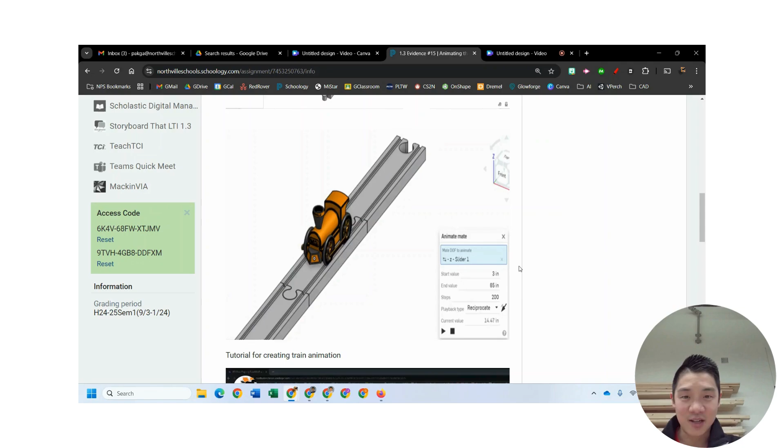So back at it, we're finishing up this animation. This is an updated video since the last one I had was a little blurry and not super clear, so we'll try it one more time. Let's give it a shot.

All right, so here's the approach. First off, here's the original one, so I'll show you where we're going with this. The goal is we're going to put together a few chunks of track, using a few mates for that. Then we're going to create a slider mate between the train and the tracks, and a rack and pinion to create the wheel motion on top of the tracks.

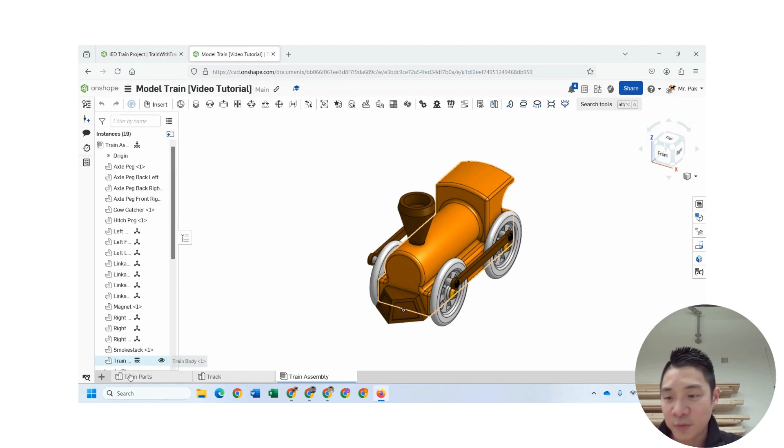All right, let's get started. First off, I'm going to create a new assembly so that we have a separated portion of this and potentially less confusing. I'm going to call it train with tracks, rename that, and let's start bringing in some parts.

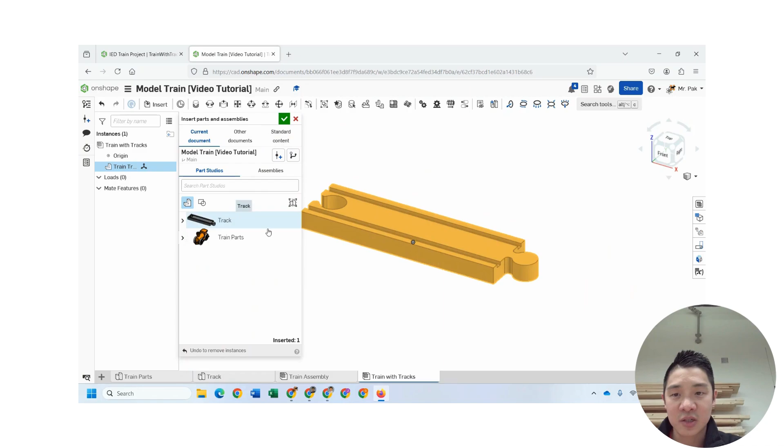So, insert. First off, I'll go and do the tracks, and as I bring these in, I'm going to click on this a few times. I don't remember how many there are on there, maybe 5 - we'll do 5, sure. All right, so there's 5. And then I'll go ahead and bring in the entire train as well, leave that on the side there.

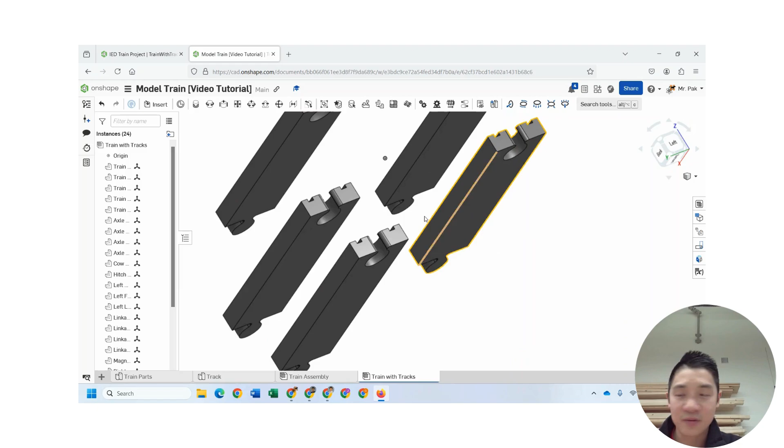Check mark. Okay, so for this first one, for the sake of organization, I'm going to move this to the middle. I'll right click on the center and say move to origin so that it's centered like that. For this very first part I brought in, right click on it, I'm going to hit fix. That way it's locked in place and everything's going to move around that particular train track.

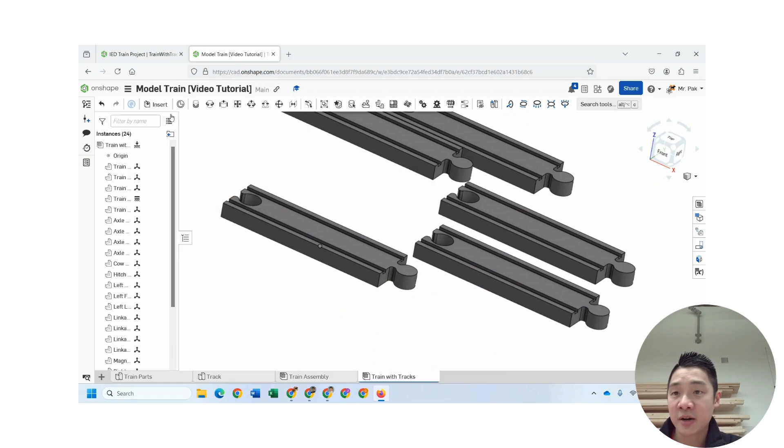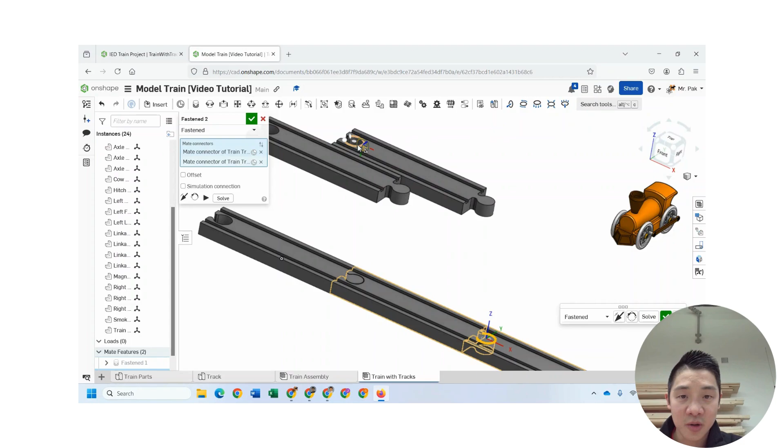Okay, so a couple ways you can do the mates here. I'm going to do fasten mates between them, and I think the easiest is probably the circle. So that circle, line up with that circle, hit the check, do the next one. This way - this circle, this one. Let's do 2 more. Here to here - oops, got rotated for some reason.

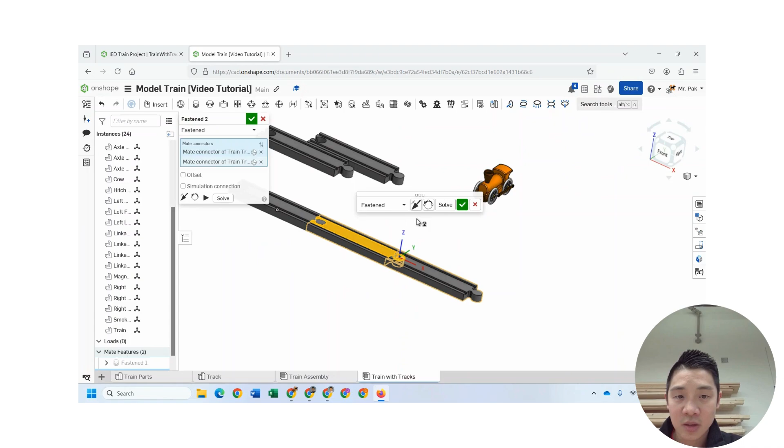You know what, let me try that one again. One more time, fasten - I'm going to do this edge to that face. Oh, there it is, okay, hit the check. Let's try another one - this face to that one. And then last one is, again, I'm going to zoom in and make sure I get that center of the circle to the center of that circle.

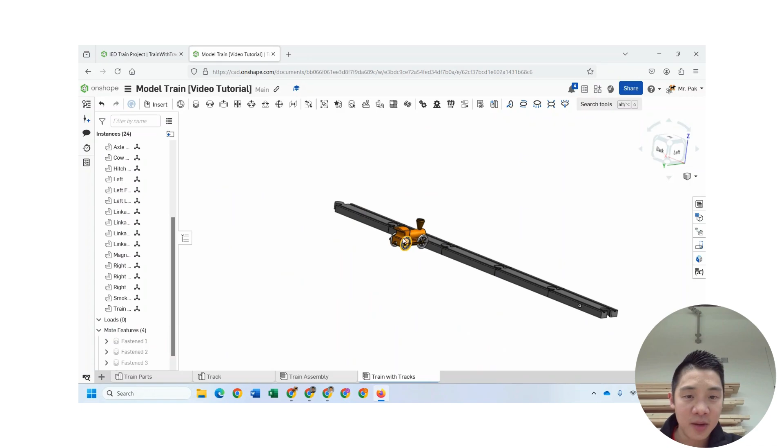All right, so we got the tracks all set up, and again I'm thinking about this as the train. Oops, let me make sure - for some reason this didn't come in as... sorry, my fault, I take that back. We want to not bring this in as individual parts. When I go to insert it, I want to insert the assembly - my fault, okay, so I want the train assembly.

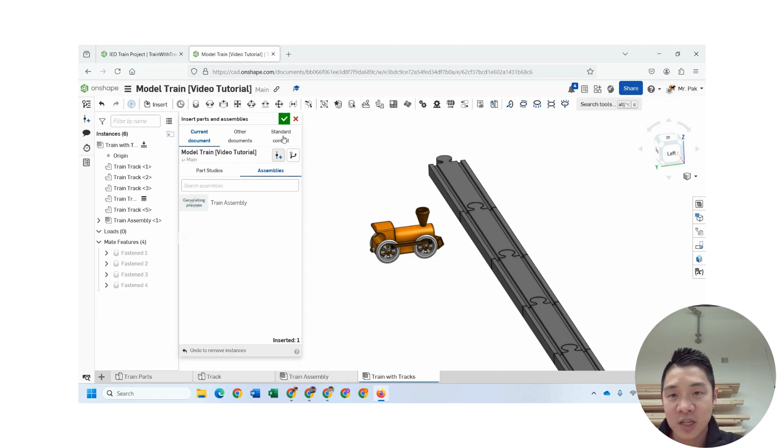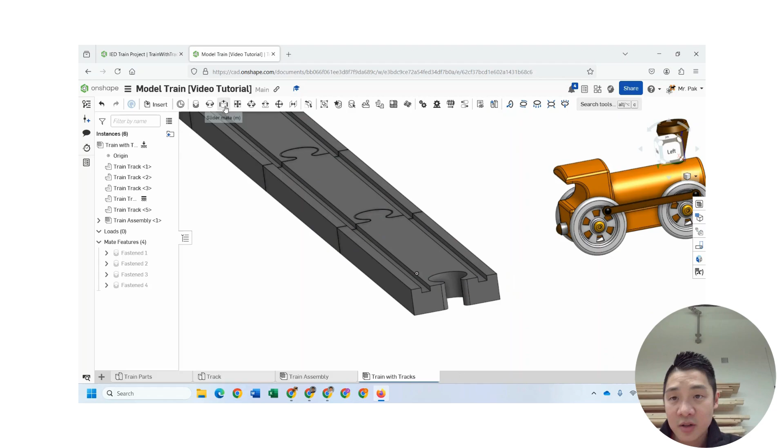So notice here, I go over to assemblies instead of part studios. Okay, so now when I move this, they should all move together. In a prior video, we already set these up so the wheels will move as needed. Okay, so where this gets a little trickier is I want this train's backside to line up to the backside here. So the way the slider works is I'm matching the faces that are going to slide compared to each other.

So I'll come up here, slider mate is what I'm choosing. The mate connector I'm going to choose is this one in the back face. I'm going to choose one of the back faces of my train, so let's go and just choose the middle. Okay, hit solve for now.

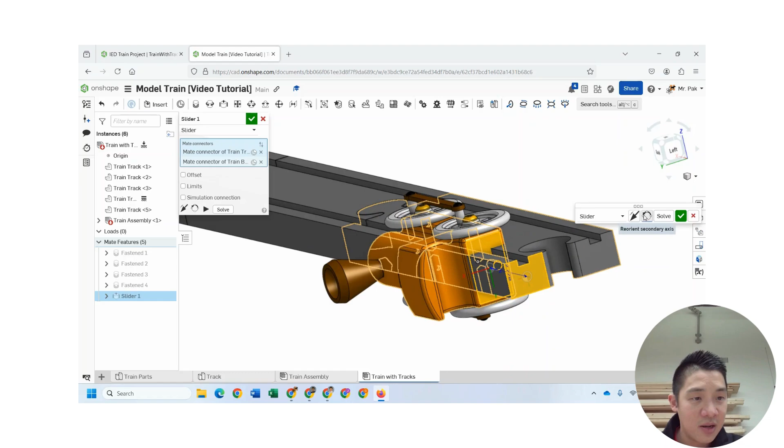And right now, if I look at this, it's probably not looking too promising, right? It looks like it's stuck to the side of it. So first I'm going to rotate it, secondary axis, hit solve again. Okay, looks a little closer, but still not exactly. The way to fix this is I'm going to create an offset so that the entire thing moves up and over so that it sits on top of the track.

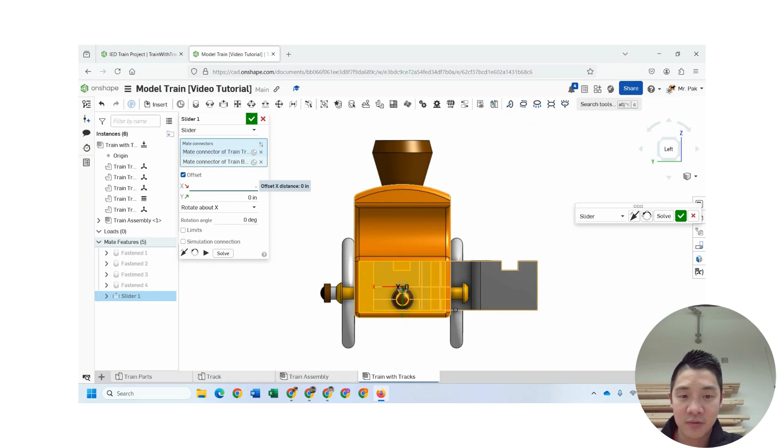So I'm going to go offset in the X direction. Right now I'm looking here, the X red is to the left, so it's probably going to be negative. I'm going to just estimate for now - negative, let's see what negative 2 does. Oh, so it does move it to the left, so I'll keep it as positive. Never mind, positive 2. All right, and right now I see that's way too far. Let's try positive 1 - still not quite. I want this to line up right to the middle.

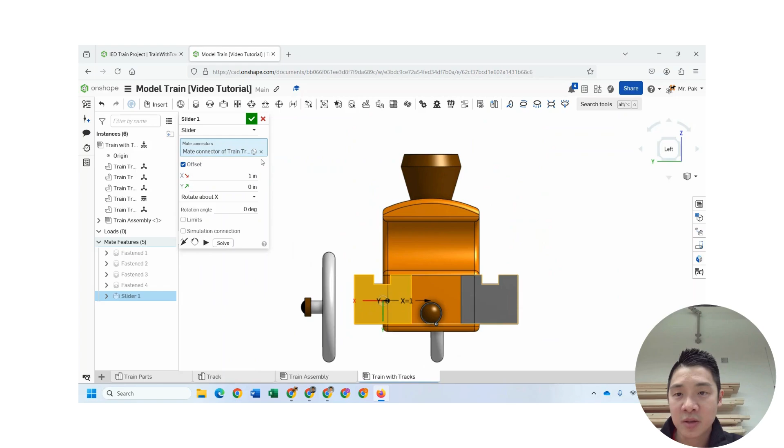And you know what? I might actually even redo this. All right, sorry everyone, let me try this one more time. I'm going to see if I can find the center of the track. I take it back, let's stick with that.

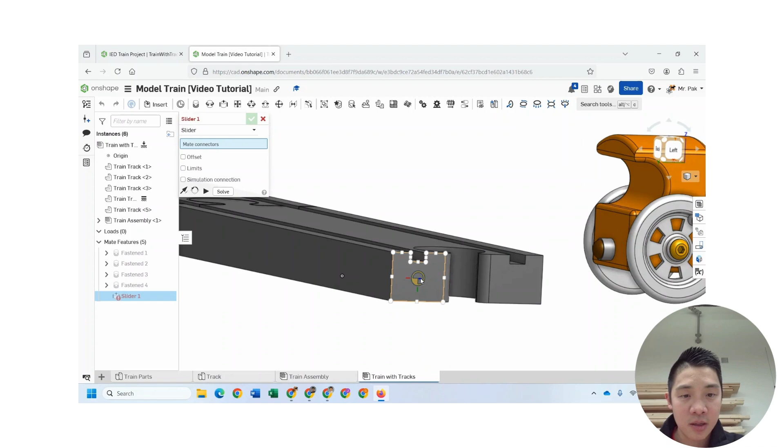Let's do an offset, so slider mate between here and here. Gonna reorient secondary axis, and let's play around with this offset one more time. Okay, so from the left-hand side, partly I really just want the distance from the center of this to the middle.

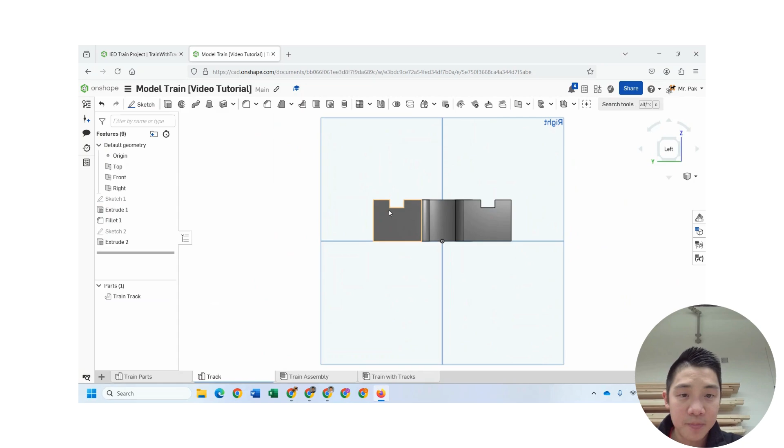So what I could do is if I look at my track, looking at the middle point here to the middle point here, and that minimum distance is 2.089. But I want the horizontal distance, so let me show measure distance, negative.

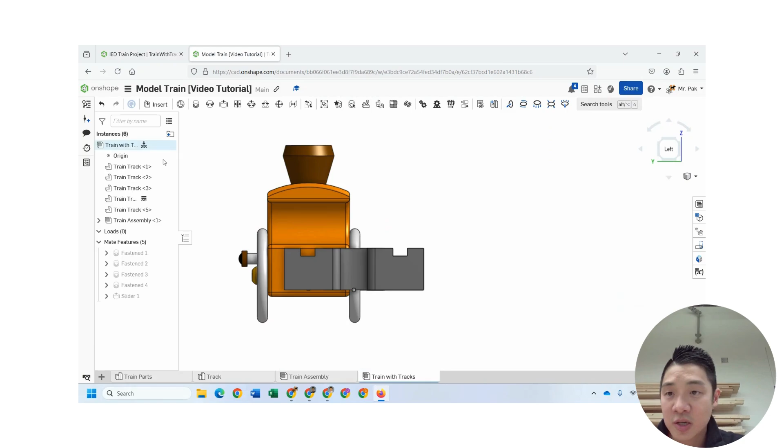1.75 should do the trick. So let's try that. Oops, come back over here. Let's change this, come back to my slider mate. Let's try 1.75, see where that takes us. That seems to move us a little too much.

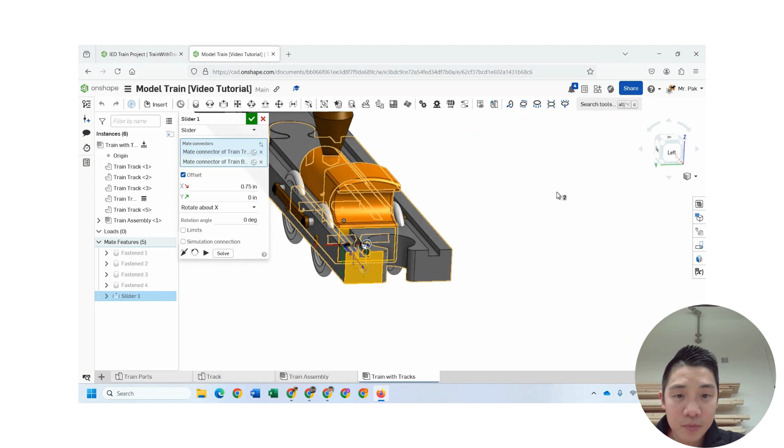So let's bring it back. How about just a 0.75? Okay, still not quite. How about a solid 1? Nope. How about 1.1? See what that does. That's pretty good, actually that looks pretty centered.

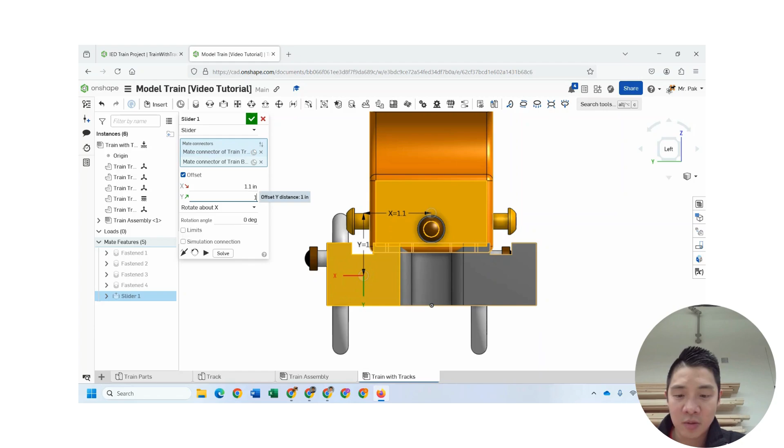And then in the Y direction, I'll bring this up so that those wheels sit up on top. Let's start off with 1, see where that takes us. Not quite. How about 1.5? Let's hit solve, see what that looks like.

Okay, we're closer, looks like the wheel's still digging in there. How about I try a 1.6? Almost, maybe a 1.7. I know this is not a very exact science. I probably could have actually gone and measured this to see.

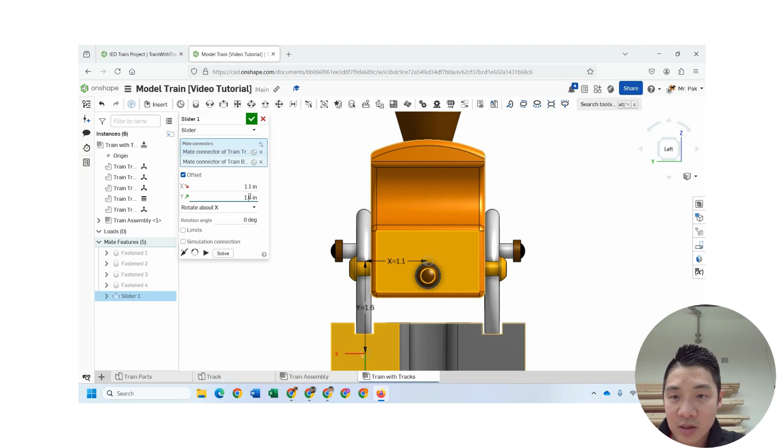Let's hit solve. Oh, actually 1.6 was probably closer. Let's try that again, 1.6, solve. Yeah, that looks good. All right, so that's sitting on there now.

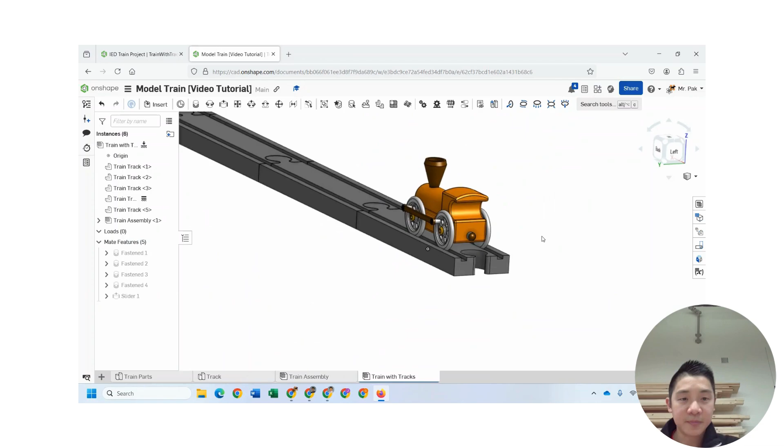Hit the check mark. Okay, so right now, if I leave it here, I'll notice that the train moves up on top, but the wheels are not moving with it. Okay, so now my final thing I need to set up is called a rack and pinion.

So over here is a rack and pinion relation, and this is essentially going to say the rack is going to be the track, so that's what it's going to move on. And then the pinion is going to be the wheel that we want to rotate. And since our wheels were previously linked, they should all move together.

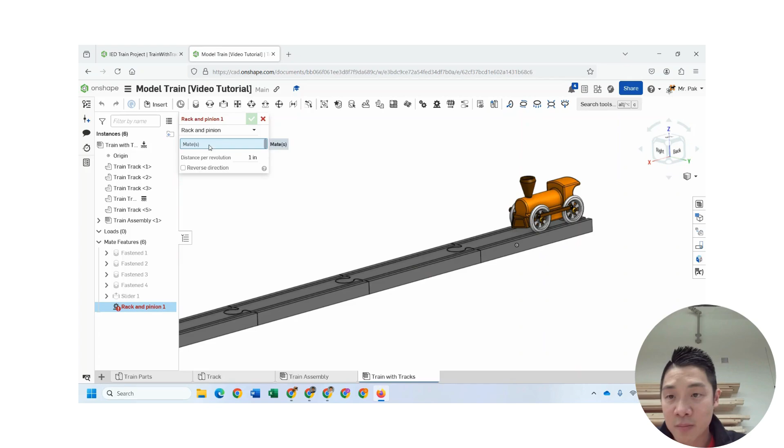Okay, so the first mate I'm going to choose is definitely the slider. The other one I want to set up is inside my assembly, so I'm going to come over here to train assembly, and it should be under the mate features. In particular, I want one of these revolute mates that represent the wheel. So for me, it looks like revolute 1 would work well.

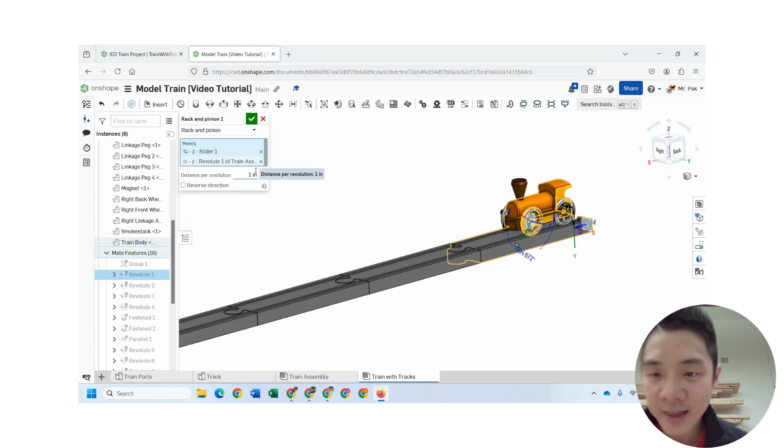And the last thing I need to do is distance per revolution, is actually the distance circumference. So every time this rotates, how far we want it to move. So for us, the wheel circumference is approximately 7. I think more specifically it's about 7.1, if I am correct.

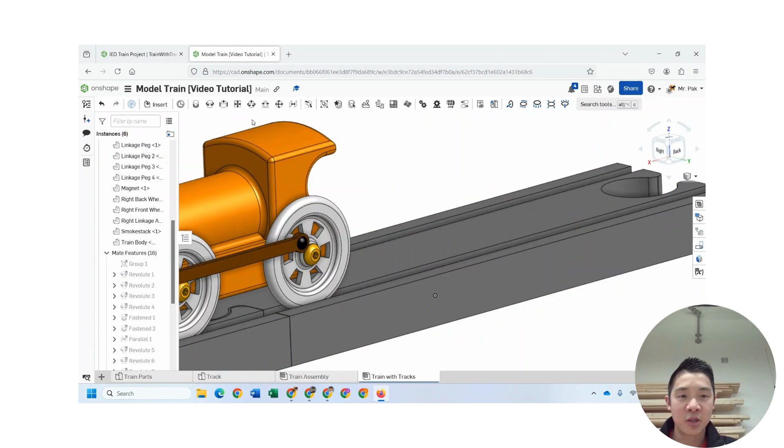And we'll go ahead and check this and see if the wheels are moving in the right direction. If not, we'll hit reverse direction. Okay, so check mark that first, and let's kind of see how we're doing. So if I notice now, every time the wheel rotates.

All right, that looks pretty good, it looks pretty accurate. All right, so I'm seeing that as this moves, the wheels are moving on the track.

Okay, and then lastly, to create that animation, let's go ahead and do that. I'm going to come over to my slider mate, right click on it, go to animate. The end value is going to be the total distance, so I think it's about 5 feet, so we'll go 60 inches.

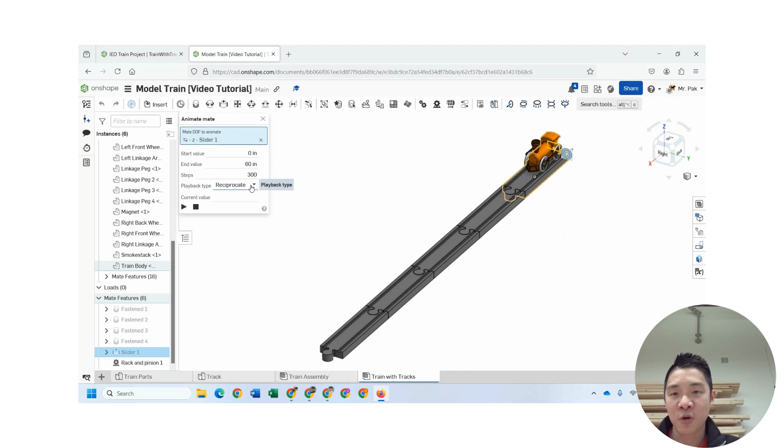The steps is just kind of how many frames per second, so how quickly you want this to move. I'm going to do this to go back and forth, reciprocate. Let's see what this looks like right now. I go play, and moving pretty well, all right.

Oh, that went a little too far, so maybe I'll change the end value, or you can add more track if you want to do it that way. All right, and that should do it. That's your animation and track assembly.